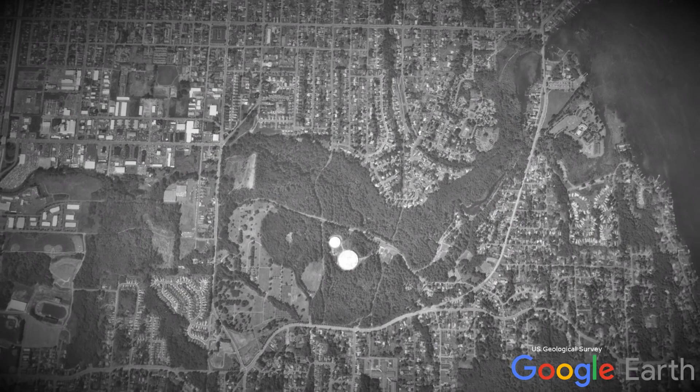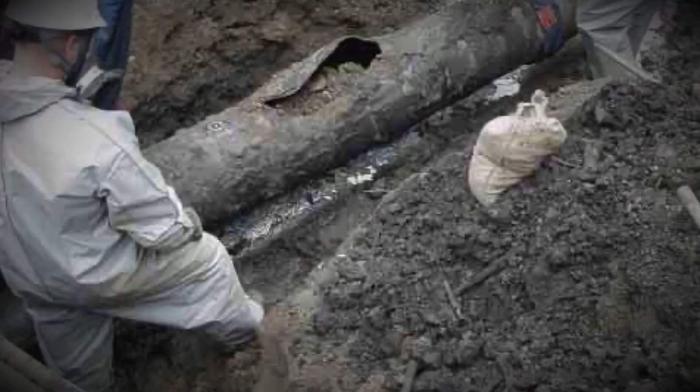It is around 5:02 p.m. on the 10th of June 1999, and a usually quiet and calm forest erupts into a fireball. A teenager fishing by the river and 2 children would die as a result of the explosion, which investigators would later find to be caused, in part, by unnoticed damage caused to the pipeline 5 years before.

Although a small death toll, the event would cause over $50 million worth of damage, affecting the local water supply and releasing over 237,000 US gallons of gasoline.

The explosion showed the inherent dangers of the fossil fuel supply chain when the transportation of fuel from refinery to shipping terminal is required. Not much can be done about this, as the constant and convenient supply of petroleum is vital to any country's economy.

As such, I'm going to rate the Olympic pipeline explosion here 7 on my disaster scale, but here 6 on my legacy scale. This is due to the event not being greatly remembered today.

Our story starts in the 1950s. Washington state had a capacity of 125,000 barrels of refined oil products being supplied from 4 refineries. The state has a problem, and that is capacity. You see, the USA has an unquenchable thirst for gasoline, and as quickly as it is produced, it is consumed.

Much of the product is transported via truck or barge, which is fairly slow, and as such a faster and more efficient mode of delivery is needed. Starting off in the early 1960s, the Olympic Pipeline Company was formed. The organisation set about to design and build a network of pipelines to connect the main refineries to terminals in Washington state and Oregon. By 1964, nearly 300 miles of pipeline were installed. Soon after, the total system numbers over 400 miles and consists of multiple lines.

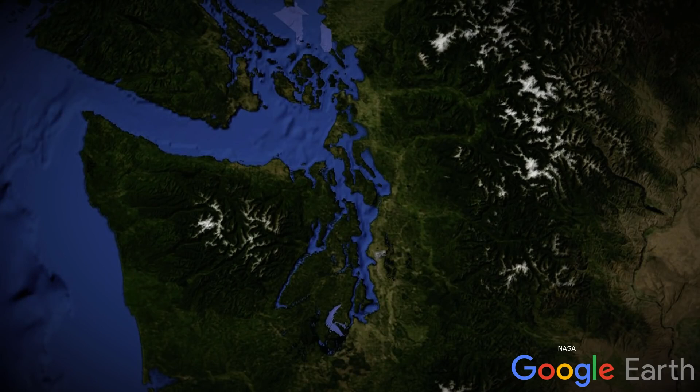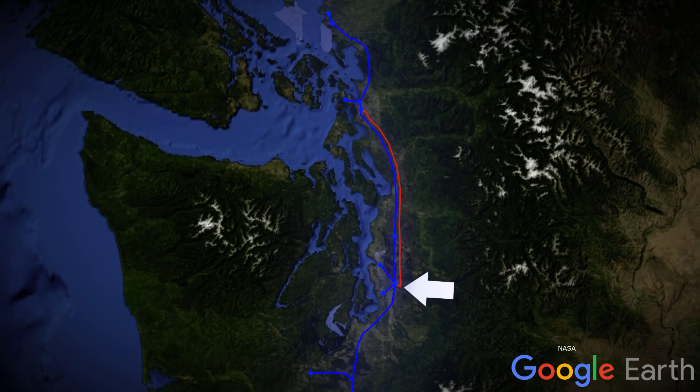In its most northern extremities, 2 lines, each 16-inch in diameter, run from refineries at Cherry Point and Anacortes, where they interconnect, then join onto a pumping station near Allen. Heading south from Allen Station are 2 lines, a 16-inch diameter and a 20-inch diameter respectively, that run parallel until reaching a pumping station in Renton. From there, a single 14-inch diameter pipeline extends south to Portland, with various smaller lines branching off to multiple terminals.

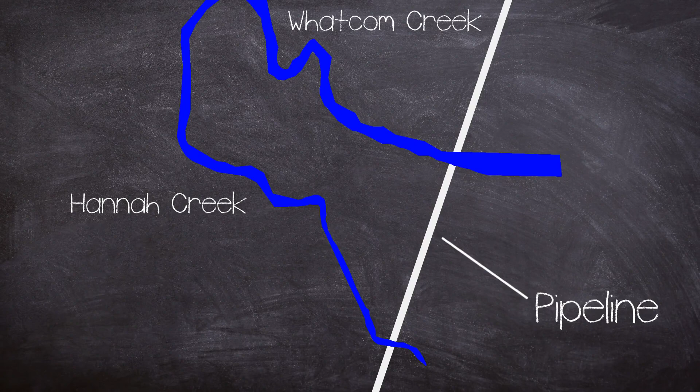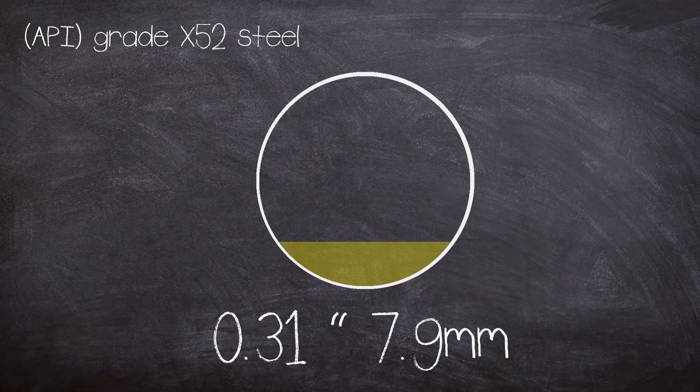Before being pressed into service, the pipeline was tested to 1820 psig on the 20th of June 1966. The maximum operating pressure was worked out to be 80% of the tested pressure, resulting in a value of 1456 psig. The pipeline safety regulations limited the allowable pipeline pressure to 110% of the maximum operating pressure during surges, which is roughly around 1602 psig.

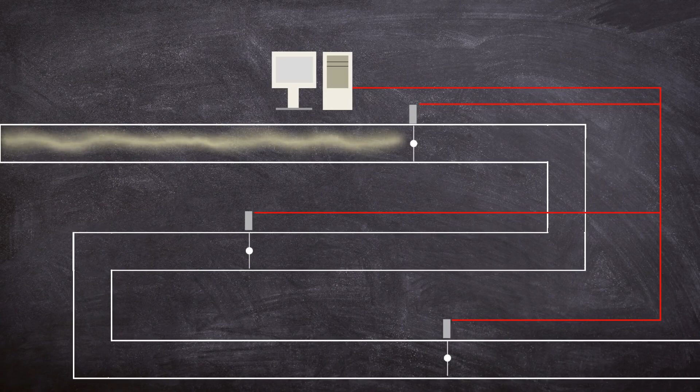Now, with such a large and intricate network of pipes, how is the pressure kept below these maximum values? This was controlled by a series of valves worked by a computer system. To control and manage the whole system, a computer administration software was employed, and this was called SCADA, Supervisory Control and Data Acquisition. The system consists of sensors, actuators, remote terminal units, a communications link, and the main SCADA computer.

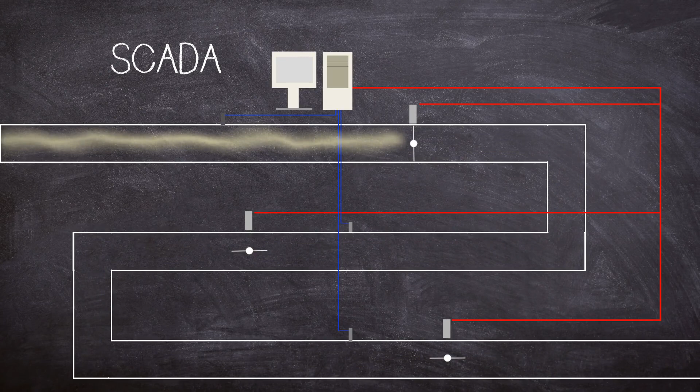The SCADA shows a network on the computer screen to operators, who can intervene to reduce pressures across the system by remotely operating valves. If situations develop that exceed preset values, an alarm can be given to the operators. Olympic's SCADA system used 2 identical computers, which were called OLY1 and OLY2. One of the computers was used as the primary system, with the other available as a backup.

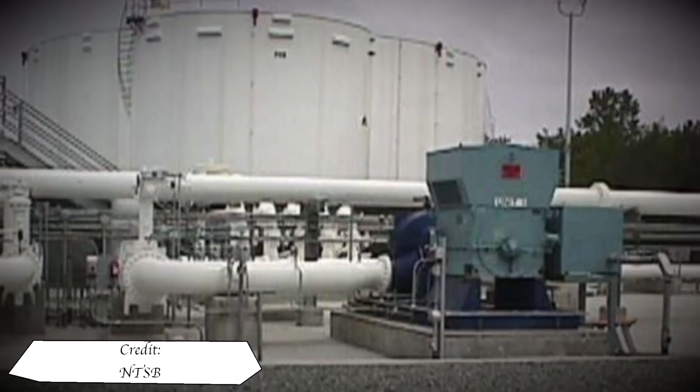The system became a victim of its own success, and as such, in 1998, a new products terminal at Bayview was constructed. The new terminal was 2 miles upstream from the existing Allen station. It housed 5 product tanks and a storage tank capacity of around 500,000 barrels. A 10,000 barrel transmix tank was also installed as a breakout tank at the facility.

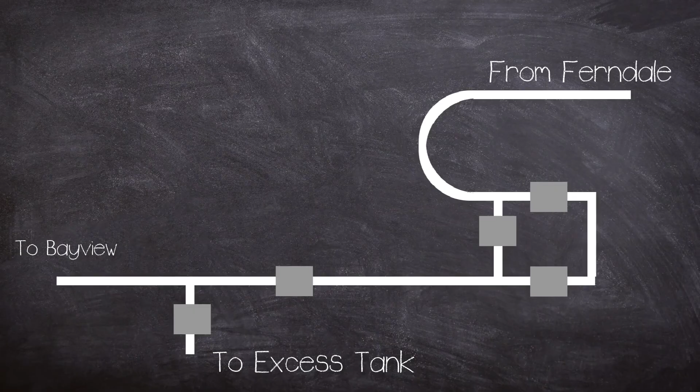To protect the facility, several valves were employed. This was to reduce and even stop the flow of fuel into Bayview in the event of a high pressure situation. The inlet control valve, CV1904, was used to throttle product flow into the Bayview terminal, and this was set at 600 psig. A relief valve, named RV1919, was installed just downstream of the control valve and was intended to work at a pressure of around 650 psig.

It was designed to open and transfer excess product to the transmix tank if the pressure after CV1904 exceeded a set pressure in the relief valve. Upstream of CV1904 was a receiver manifold arrangement, consisting of 3 motor-operated and remotely controlled block valves, and these also controlled product flow, but were set to close completely if a pressure of over 700 psig was experienced in the facility, thus blocking the whole pipeline upstream from it. These were only intended for extreme circumstances.

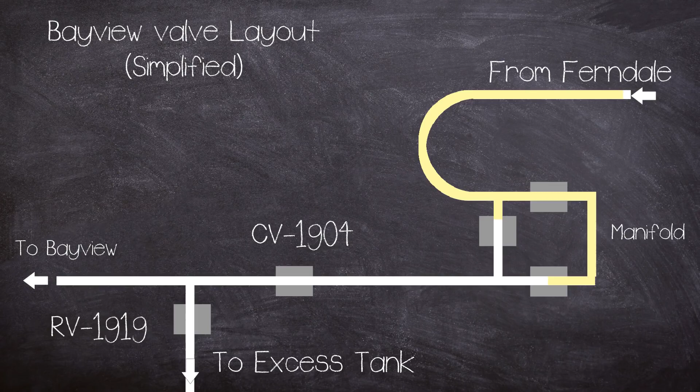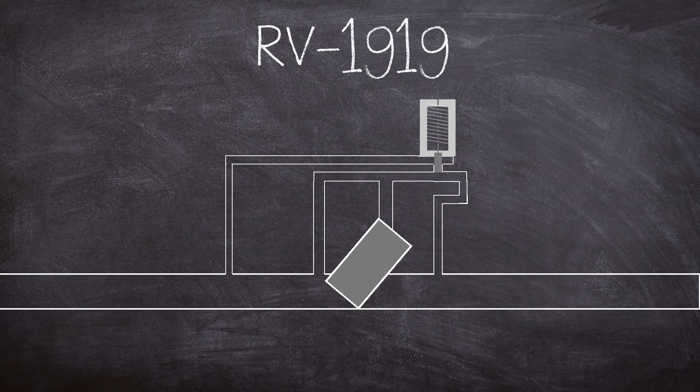The system also had another overpressurization prevention system, and that was the pumps at Ferndale having a set limit of 1400 psig, which if reached would shut down, reducing the flow of fuel. When the relief valve was installed, a mix-up in specifications meant that RV1919 was set to operate at only 100 psig. When Bayview was opened and the line was repressurized, operators noticed RV1919 opening at 100 psig, even though this was out of spec.

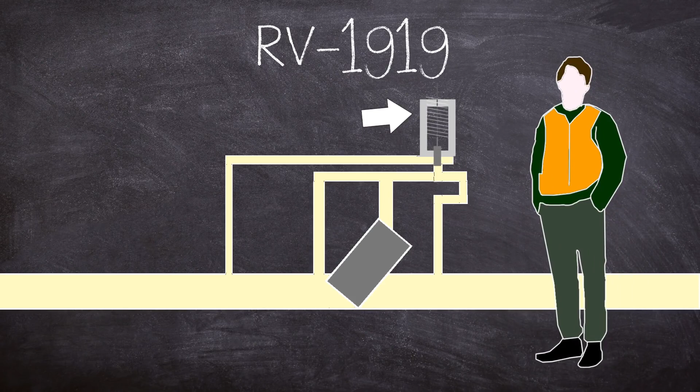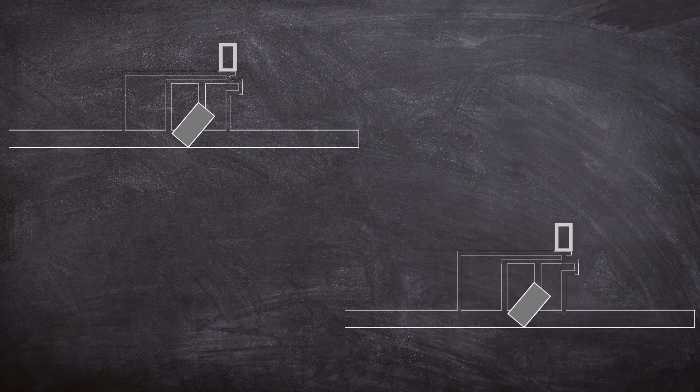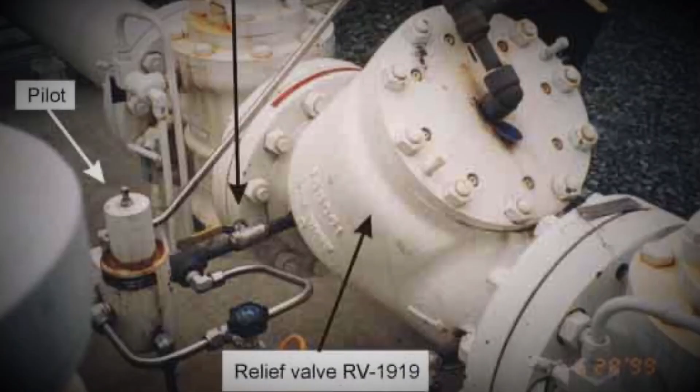The engineering supervisor instructed staff to find out why, aware that the operation of the valve was from a pilot valve and spring that could be adjusted. Thinking it was at its maximum setting and not reading the instruction manual, a new spring was ordered. The manual would have told them that the supplier made 2 types of valve, a high and low pressure model, both of which used the same spring, meaning replacement would yield no change of operation. Regardless of this, the spring was replaced and the valve was adjusted, allowing the line to be pressurized.

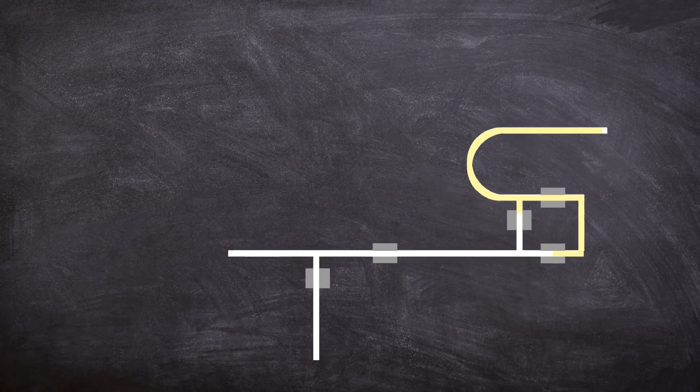This resulted in the inlet block valve closing around 35 times between 1998 and 1999. Operators didn't think this was much of a problem, but you see, the inlet block valve is a safety system intended to only automatically step in during points of extreme operating conditions of high pressure. This is what the relief valve is there to do, but Olympic Pipeline did not investigate these abnormal valve operations properly. And this brings us on to June 1999.

It is the afternoon of the 10th of June 1999. 2 controllers operate the entire 400-mile pipeline system from the Olympic control room in Renton. In addition to this, an Olympic pipeline controller, who had been temporarily assigned as a computer system administrator, was also working in the control room. Each controller is in charge of a separate section of the network. Throughout the day, the SCADA system was operating as normal, using computer OLY02 as the primary machine, with 01 running as a backup. At around 3:10 PM, the administrator began to note errors being logged on the SCADA system after undertaking database development work.

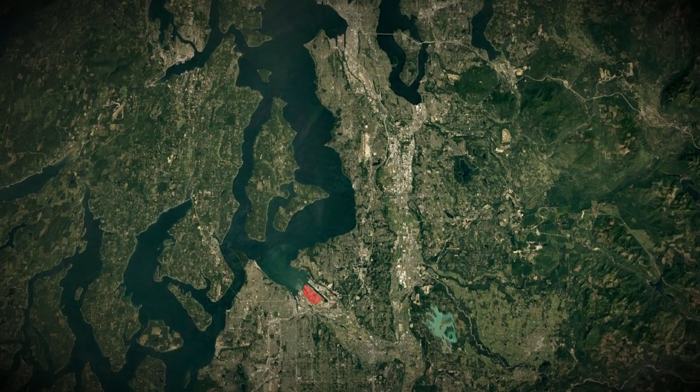At around the same time, one of the controllers began preparing to stop product delivery to the Tosco facility and start delivery of gasoline to the Harbour Island terminal in Seattle. At around 3:20, the North controller contacted personnel at Cherry Point Refinery and asked them to begin transferring product to the adjacent Cherry Point pumping station. The pressure in the pipeline began to rise. This is normally remedied by starting a second pump at the unattended Woodinville station. This required the controller to issue the command via the SCADA system. The system failed to send the signal, and almost instantly the pressure in the line rose to 1440 psig.

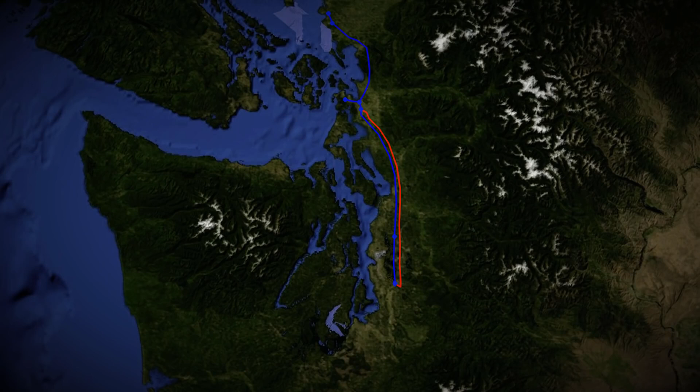The controller responsible for the other sections of the line also noted that their commands into the system had become unresponsive. The administrator attempted to change over to the OLY01 computer. At around the same time, the controller phoned the pumping station at Allen to get them to shut down one of the pumps. As the pressure increased, the block valve at Bayview began to close. The pressure sensors in the area recorded a 1494 psig reading at 3:28 p.m. Uncommanded shutdown of the pumps at Cherry Point and Ferndale stations also happened at the same time. With the shutdown of the Cherry Point and Ferndale pumping stations, the 16-inch pipeline was essentially dead from Cherry Point to Renton, with a single pump at Woodinville the only remaining operational unit left.

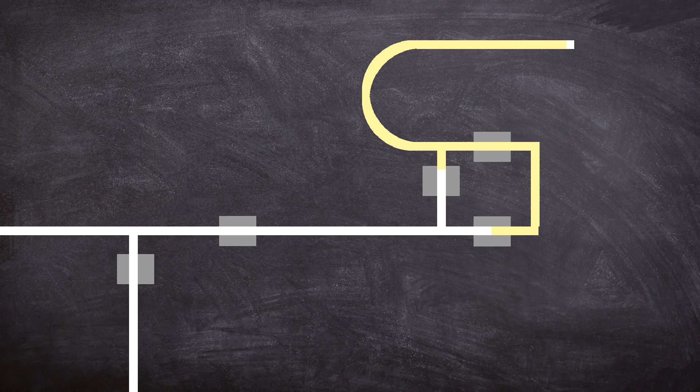Strangely, just a minute later, at 3:29 p.m., the system recorded the pressure dropping back down to 230 psig. Little did they know, but the section of pipeline next to the water plant by the city of Bellingham had ruptured, the very same section rerouted back in 1966. Frantically, the administrator tried to get the SCADA system back up and running, eventually returning to operation on OLY02 at 3:45 p.m. At around 4 p.m., the controller came into the computer room and asked if the pipeline could be restarted. At 4:11 p.m., the inlet block valve reopened at Bayview. At 4:15 p.m., the controller contacted the refinery and asked that product transfer be restarted. At 4:16, the controller started the pump at the Cherry Point station, followed at 4:17 by starting a pump at the Ferndale station.

An Olympic employee travelling on his way home called the control centre to report smelling gasoline at a bridge over Whatcom Creek. By now, fuel was pouring out of the ruptured pipeline, and the smell of gasoline was becoming unbearable for anyone nearby. As such, multiple calls to 911 were made by the public. The Whatcom Creek turned a strange colour. The local fire department escalated the response to a hazmat level incident.

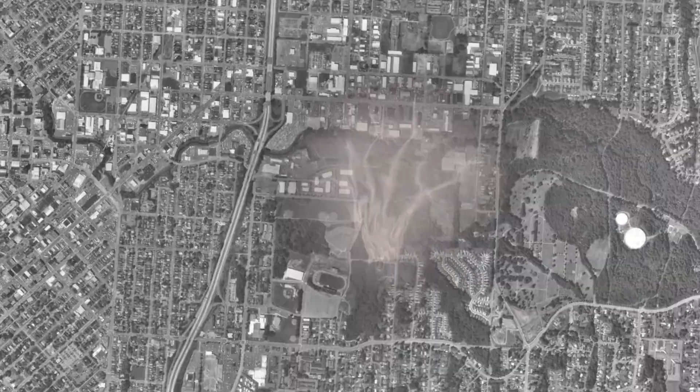At about 4:35 p.m., the controller contacted ARCO again and asked that the transfer of fuel be stopped. Emergency responders started cordoning off and evacuating the areas that smelt of petrol. At 5:02 p.m., fire department staff started to see fire igniting in the Whatcom Creek, and Bellingham police officers also witnessed the ignition. The fire turned into an explosion, releasing a plume of smoke 30,000 feet into the air. The temperature was thought to exceed 1090 degrees Celsius.

3 were killed. Liam Wood, 18, who was fly fishing in the creek, drowned after succumbing to the fumes, and 2 children, Wade King and Stephen Tsiorvas, both 10, were playing near the creek. Both survived the blast, but sustained severe burns, dying the next day in hospital. 8 more people were also injured. Around an hour and a half later, the fire was quelled, with most of the smoke dissipating by 7 p.m.

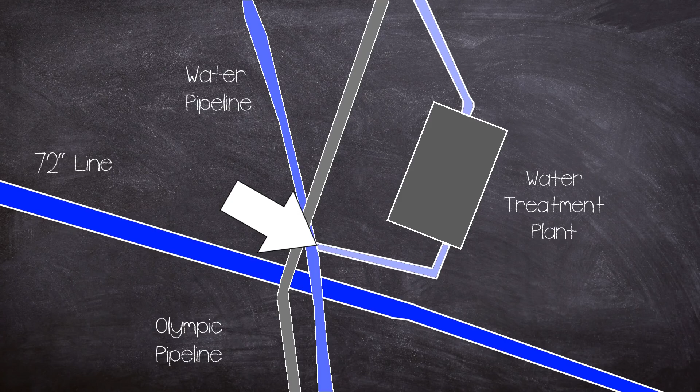On the 9th of May 1994, during installation of a 72-inch diameter steel water line that was to cross the line, the 16-inch pipe was exposed. Olympic's pipeline was then covered with material on the 12th of May 1994, with the water pipe placed some 36 inches above it. This work was undertaken under the watch of Olympic pipeline officials. More work was undertaken over the pipeline to install a T between the existing water pipeline and a new discharge line from the improved treatment site. An Olympic inspector was present, but only for part of the day.

More duct and pipe work was installed during the water plant upgrade, with most but not all the days being witnessed by an Olympic employee. On the 11th of August 1994, several witnesses noted the pipeline being struck 17 feet north of the centre line of the T connection. Although Olympic was not informed of this, personnel coated the area of the pipeline that had been struck with a mastic coating before backfilling over it. When looking at a diagram of where the rupture happened, we can see that the works for the water treatment plant and the strike location match up.

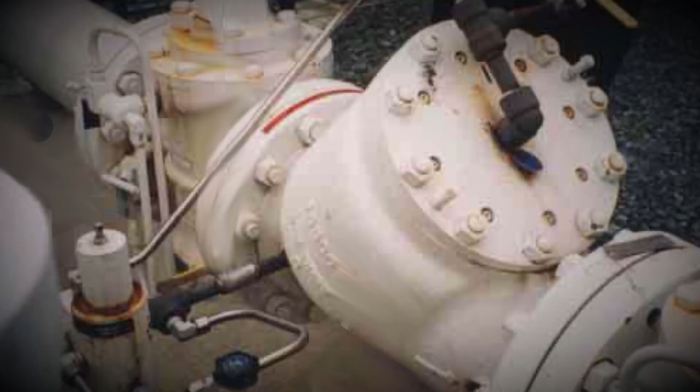The pipeline was inspected between 1991 and 1999, and anomalies were discovered in the area of the waterworks, but no remedial action was undertaken. Investigators found that the cause of the rupture was due to multiple failures, stemming from the initial damage to the pipeline. But the disaster could have been averted with proper investigation into the damage. But the failure goes much deeper than that, as the way Bayview was brought online with the malfunctioning relief valve led to extended times of high pressures within the network, which in turn caused the damaged section of the pipeline to rupture. The warning signs of the block valve repeatedly closing were not rectified by Olympic.

This problem was further compounded with the actions of pipeline staff, undertaking database development work on the SCADA system whilst it was being used to control the pipeline, leading to a complete system failure. With the system unresponsive and the block valve closing, pressure surges found the path of least resistance, the damaged section of the pipeline, which resulted in catastrophic structural failure and ignition.

Apart from the human cost, property damage was estimated at $58 million, most of it caused by the ignition and fireball. Many nearby buildings were damaged with broken windows, with one house being completely destroyed. The water treatment plant near the explosion site survived, but most of the machinery within was severely damaged. The line was eventually, however, repaired and brought back into service.

Olympic reached a $112 million settlement with the victims, and in 2000 the pipeline was taken over by BP, and the company still operates the line today. The area around the rupture and fireball still shows signs of damage, but like all things, nature has done a lot to reclaim and cover the evidence.